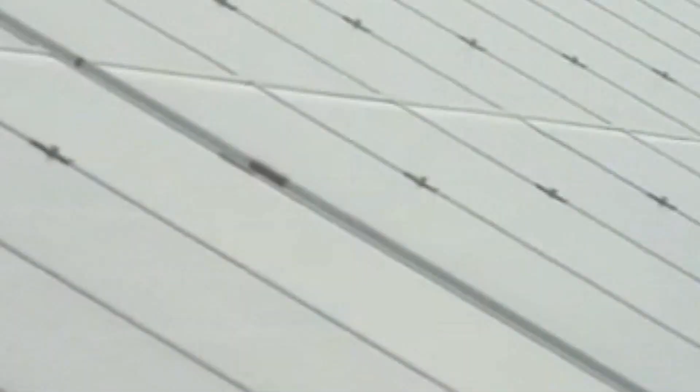Hello and welcome to the Emerald Planet as we come to you from Washington D.C. in the United States, as we look around the globe in 144 different nations, looking for those 1,000 best practices, the technology, services, and products that are making a difference as we go through the 21st century.

And one of the things we have to be most concerned about is water. As we know, around the world many countries are literally just drying out. Other places there are massive floods. It's contaminating the groundwater that people actually drink, and it's contributing to sea level rise, as some nations in the South Pacific are actually disappearing. So how do we think about water? How do we access water? And how do we make sure we have enough good water for all of us to drink?

That's the job of an organization called DC Water. Water is Life in Washington D.C. And sitting right beside me is Ryu Suzuki. He's a professional engineer, and he's the manager for process engineering, which we'll learn a whole lot about, at DC Water. Water is Life. Ryu, thank you for being here.

Yeah, it's my pleasure to be here.

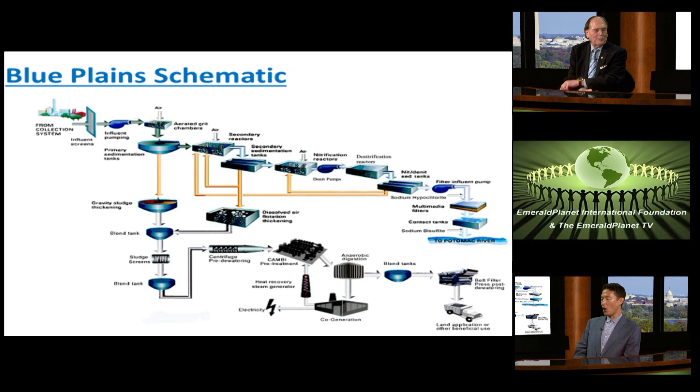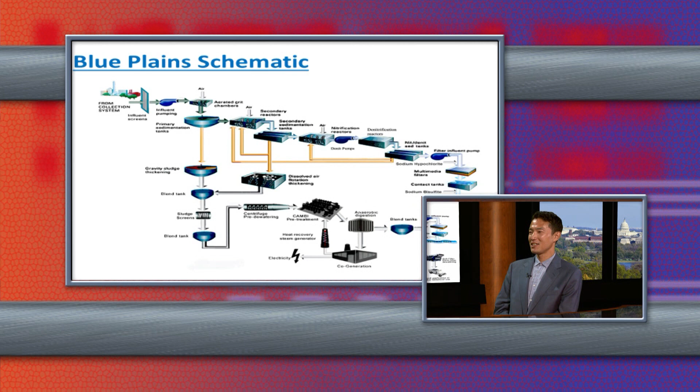The next part is called primary treatment, and all it is, is a circular tank. Imagine taking some muddy, murky water, putting it into a bowl, and letting it sit for two hours - what happens? It all settles. That's all it is, a simple physical process.

We've been doing this primary treatment since the 1930s. Whatever settles, we pump the solids out into solids processing, while the clear liquid overflows into the next process. After that is where the biological treatment starts.

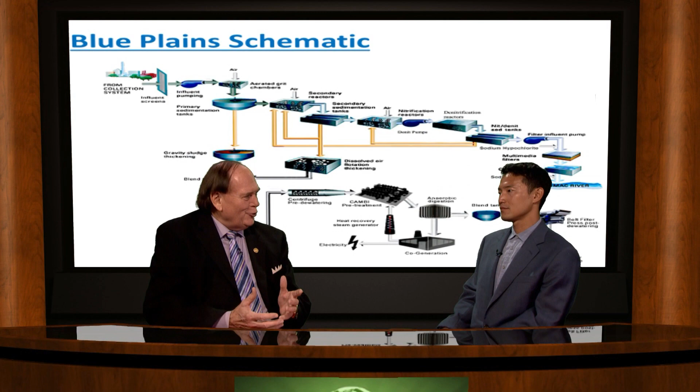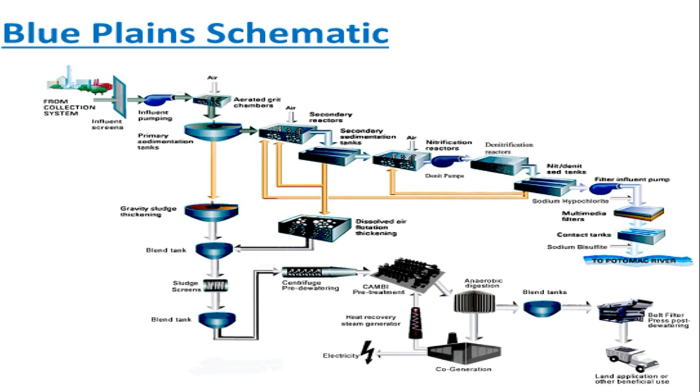This is something our viewers will find very interesting, because you've now gone from the mechanical to the biological process, where aerobic and anaerobic bacteria start to do their work. Yep, exactly - it's way more cost effective to let the microbes, these tiny microorganisms, do the work for us. There's trillions of them, which people have no idea about. It's a whole diverse ecosystem doing the work for us.

This is really a beautiful layout, and these are some of the new improvements you've made since you've been there. So what are we seeing here in these colors - the blue, the green, yellow, and pink?

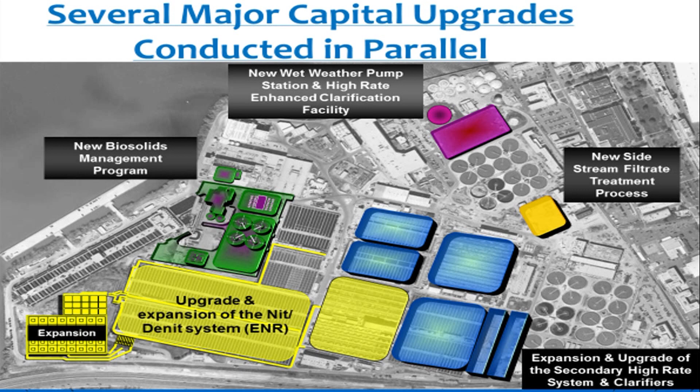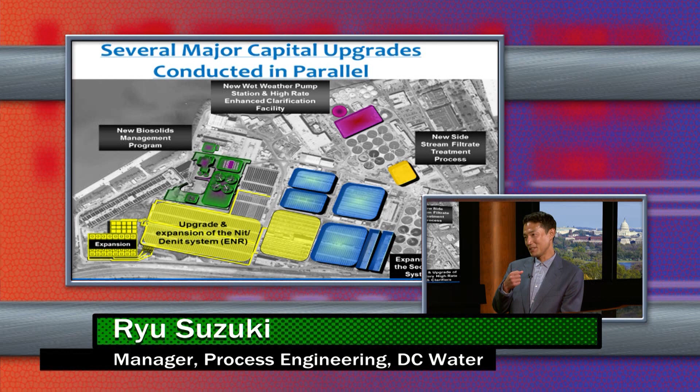The blue is the expansion of the secondary treatment, the biological system, where we add a lot of air and grow beneficial bacteria that munch away at what we flush down the toilet. In a way, these bacteria are like you and I - the three things they need are food, which is what we flush down the toilet, air, which takes a lot of energy to provide through big blowers, and plenty of water. It's about providing more space and upgraded equipment for them to do their work.

And then green and yellow? The yellow is the nutrient removal - that's also to comply with a very stringent limit, which is why we had to expand our existing facility.

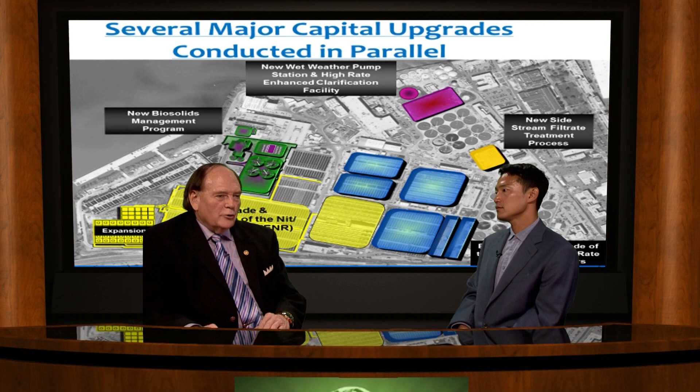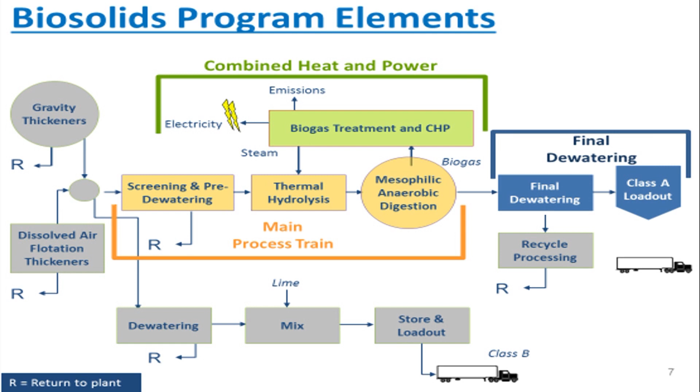We'll talk about the green, the biosolids, a bit later - I know this is really your pride and joy, taking care of all this and turning it into useful products for DC Water itself, not just sending it out to the countryside, but actually turning it into electricity, which we really want to spend time on. Yeah, absolutely, because that's very important.

We'll get to the hydrolysis later on. But looking at this, what do you see DC Water being in the next 5, 10, or 15 years as far as improving its processes and giving even better service to its ratepayers? I think the biggest thing we're pushing for relates to the Clean Rivers project with the big tunnels - we've invested a tremendous amount of resources into it. Now, because ratepayers are getting hit hard, we have to figure out how to optimize and make our entire organization more efficient.

When you look at this technology here, it's absolutely incredible, and we're going to get to that in just a little bit. This is Ryu Suzuki, professional engineer, manager of process engineering at DC Water. Water is life. Thank you for being with us as we create the Emerald Planet.

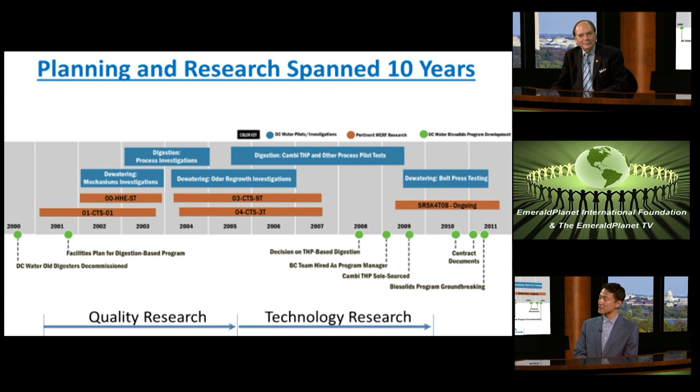And also, so you got the long-term cost as well as just to be able to create this good product. Yeah, but doesn't the regulators have something to do with this? Isn't that really one of the principal drivers behind all of this, to make sure that the water is coming out the cleanest possible? So yes, on the liquid side, we have put in enormous investment to clean the water itself, but the byproduct is the solids.

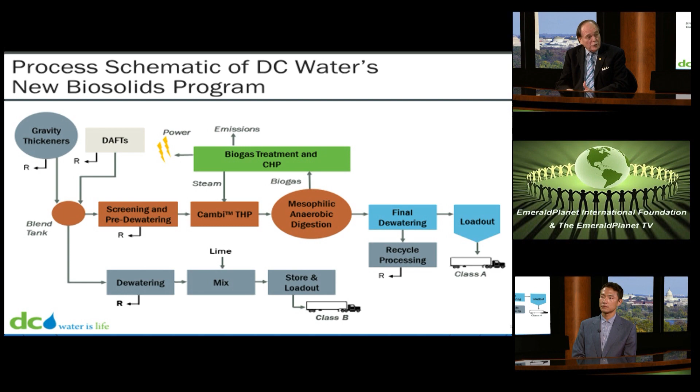And that was actually not driven by regulation. That was all more based on looking at the long-term operational sustainability of DC Water. Yeah, and that's really important. Sustainability, resiliency, and also innovation, because you really just scoured the whole world as far as finding the best technologies. So where did you actually get this particular technology that then you brought into DC Water? And now it's an incredible process.

Yeah, so actually this thermal hydrolysis, it's been going on in Europe for some time. The company is originally from Norway. This particular system that we bought, and now many other companies are getting into offering a similar product as well. So they've been doing it in Europe, and it seemed like it's the appropriate fit for DC Water as well.

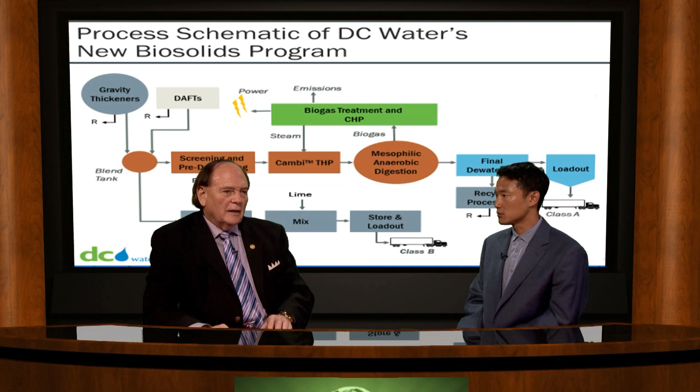Yeah, an appropriate fit we're looking at now. This is enlarged because I took over a lot of extra space out of your footprint out there. But tell us what we're looking at in this green and purple space. Yeah, so this is most of the solids treatment process that we're going to be talking about in a bit. And what we do is take this tremendous amount of organic material and convert it into clean biosolids as well as renewable energy.

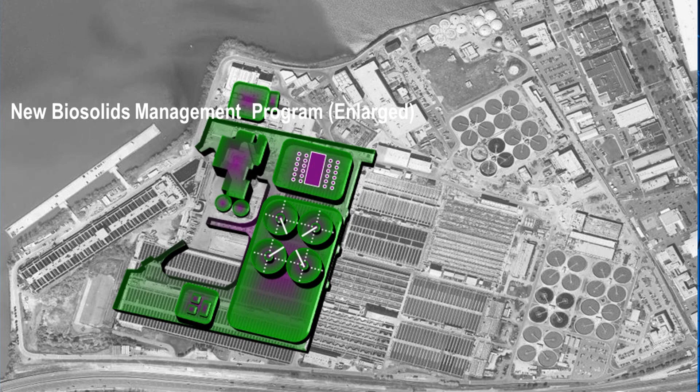Yeah, and the whole thing about this is taking that. This is a waste. You've been shipping it, it's got to go by trucks. You're trying to find land out in the countryside where it can go, but stay away from estuaries, the creeks, the ponds and the rivers and all that. It seems like you've really come up with an excellent solution because you're producing all this right there and you use it right there and turn it into a kilowatt.

Yeah, well, that too. But originally, one of the biggest advantages of having an anaerobic digestion system is before, what we did was add lime to all the solids, raising the pH up to 12 to get this Class B. And we had to truck out about 60 trucks every day. That was close to $19 million a year. And just think about the amount of greenhouse gas emissions from all those trucks running on the highways. We certainly have enough cars and traffic on the highways around Washington, D.C. We don't need more, we need less.

Yeah, absolutely. But with this new thermal hydrolysis / anaerobic digestion system, we're converting half that solids into biogas, which is a combination of methane and carbon dioxide. And it goes into another combined heat and power facility where it gets converted into electricity and heat to drive the thermal hydrolysis process, which is the steam. To pressure cook the sludge.

Yeah, and this is really very efficient that you're doing, and I find this absolutely amazing that maybe we waited so long to do this, but I guess the Europeans perfected this, particularly the Norwegians, and then we decided well, this is something we need to really try here. Was that part of that process?

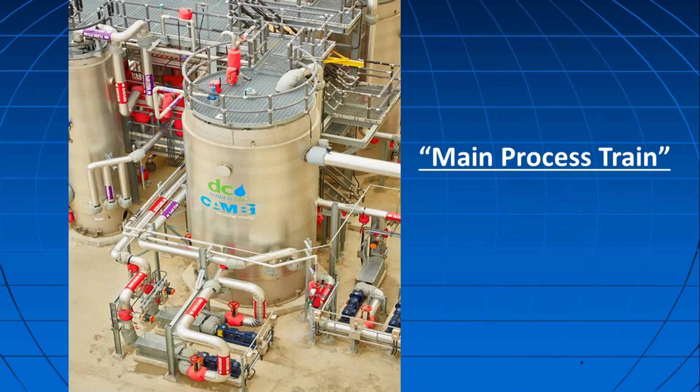So the main process train is basically the main process train of the solids processing. And what it is, not only does it include the thermal hydrolysis and anaerobic digestion, but all the other auxiliary systems that we need to be able to make this system work.

Now we have this here. This is a beautiful piece of equipment. Of course, if you like engineering and technology, this is beautiful. Other people would say something different. But the process of this, what would have been there before? Would it have been nothing, or would it have been much simpler and much less complex than what we're looking at right now?

So for the people watching, how have we morphed to the next level as far as processing? Anaerobic digestion is like a massive cow stomach that takes organic material, stabilizes the solids, and converts it into biogas. If you have raw food solids, it takes a lot of space to break it down fully and get the full reduction of solids to let the biology do the work. But if you cook the material first, like cooking beans, it takes way less stomach volume to do the same amount of treatment, making it way more biodegradable.

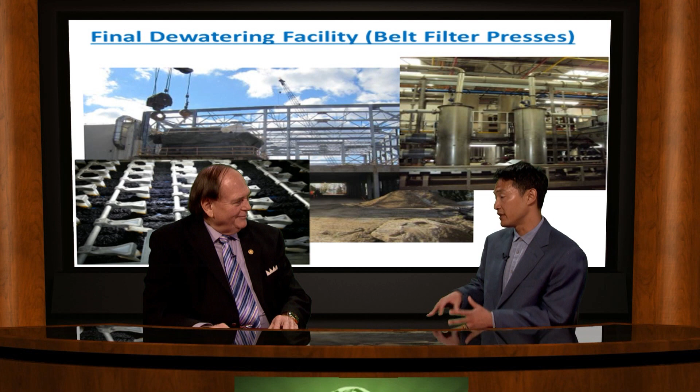Another major advantage is because we're cooking it at such high pressure and temperature, you're sterilizing the solids, since these solids have a lot of pathogens in them. At this high temperature and pressure, you're annihilating it all, sterilizing and killing all of that off.

Now, dewatering, why is that so important? We still have to haul the material from our site to different gardens and farms for land application, and you want it to be as dry as possible because water is very heavy. Also, wet solids are easier to get into streams and ponds or whatever surface water you have, versus being dry and just spread across the top of the soil.

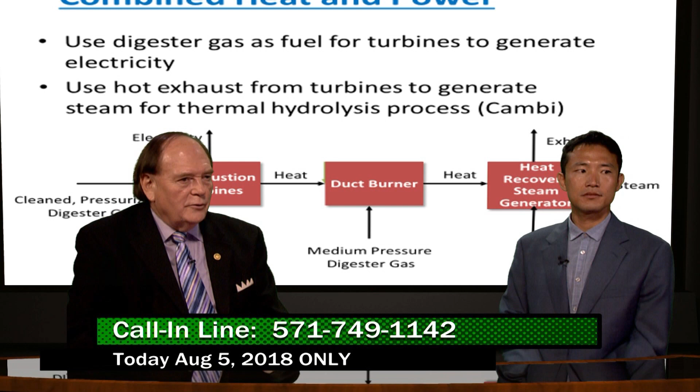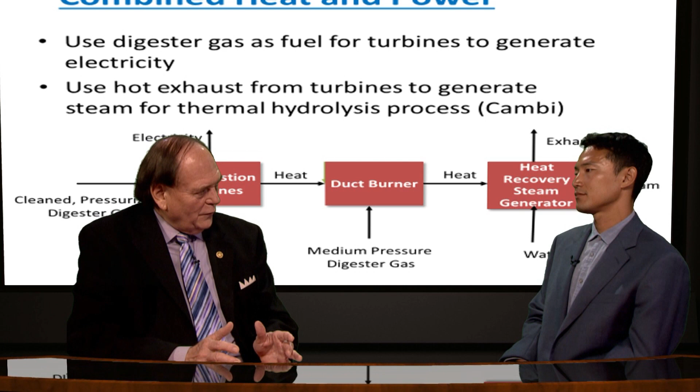Yeah, this is really a nutrient that the farmers are using. Combined heat and power is something you referred to briefly before, but it's something that's really new here. Tell us why this is so important for DC Water, but also for the ratepayers and the environment, because that's really the ultimate goal. How does this really help?

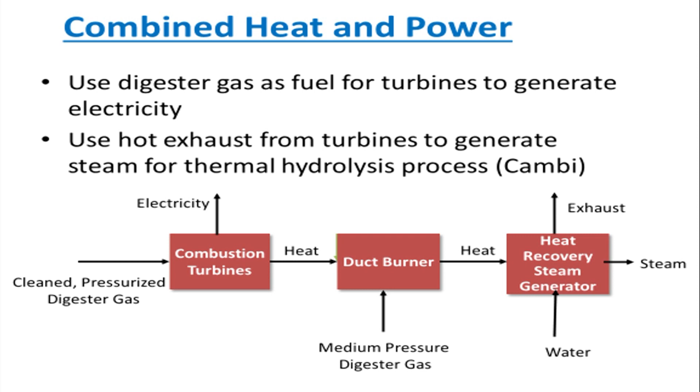In the digestion process, we generate all this biogas that has about 65% methane, or natural gas. First we clean it up, then compress it to a very high pressure, and combust it through combustion turbines to generate electricity. We're the largest energy user in the DC area, and this meets about a third of our energy needs, enough electricity to power about 8,000 homes, all from what we flush down the toilet. There's a lot of energy value in it, and that's what we're using it for.

This is really just a schematic of what we were looking at earlier, the layout of this whole facility. Looking at the future, what do you see as far as this thermal hydrolysis process over the next 5, 10, or 15 years? Do we go from a third to half, two-thirds, three-quarters? Are you going to generate your own electricity and steam, or what do you see realistically for the future?

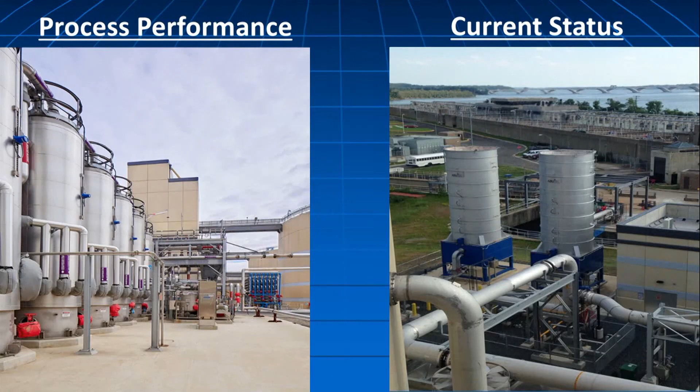For the near future, I think at least mine and our team's main goal is to really maintain and optimize the system, because there are a lot of moving parts, and our ratepayers have made a tremendous investment. So it's our duty to make sure this system is sustainable and we're able to keep running it. Process performance, current status, all of this is to make it that much better. If you can expand it gradually over time, you want to do that, but for now our main focus is to maintain what we have.

That's fantastic. Ryu Suzuki, professional engineer, manager of process engineering at DC Water, Water is Life.

This is just incredible to take this tour through your, we'll call it a campus, because it's a beautiful location, a beautiful site. Thank you, as we create the Emerald Planet.

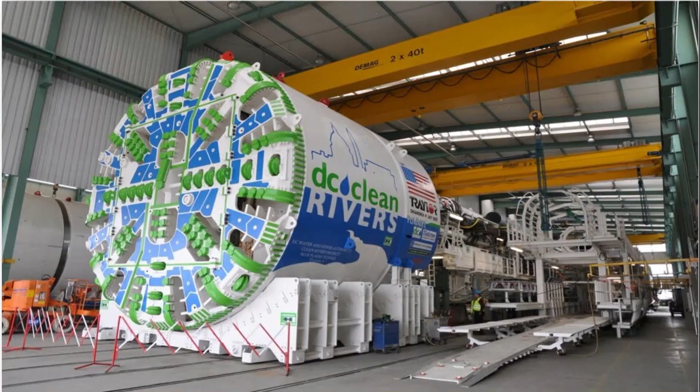Absolutely. So we're looking at one of our tunnel boring machines. This is one of the machines cutting the tunnels we're constructing underneath the district as we speak. We're building 18 miles of deep tunnels to intercept combined sewer overflow and capture that flow to keep it out of our waterways. The tunnel boring machine is typically about 450 feet long. They're assembled, or constructed, in Germany and then shipped over. At least this machine was built in Germany and shipped over in about 17 pieces. It cuts a 23-foot diameter tunnel.

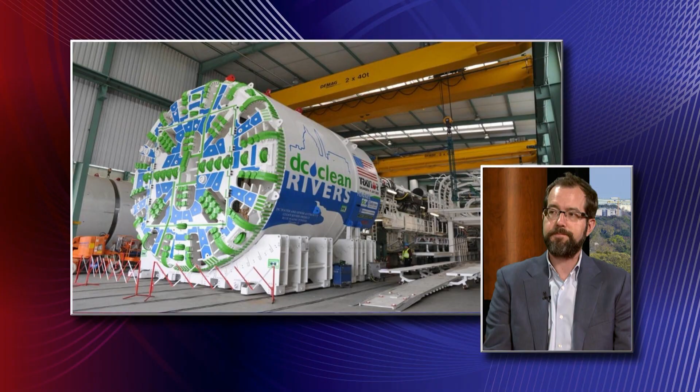That's so incredible, hard to imagine - a massive machine. Yeah, and you look at this, and it's not that overwhelming as far as looking at it, but something that can cut 23 feet - I mean, that's huge. I can tell you, as someone who's been down in the tunnel, and also stood in front of the cutter head of these machines, it is absolutely staggering, just the enormity of the machine itself. It's really just massive.

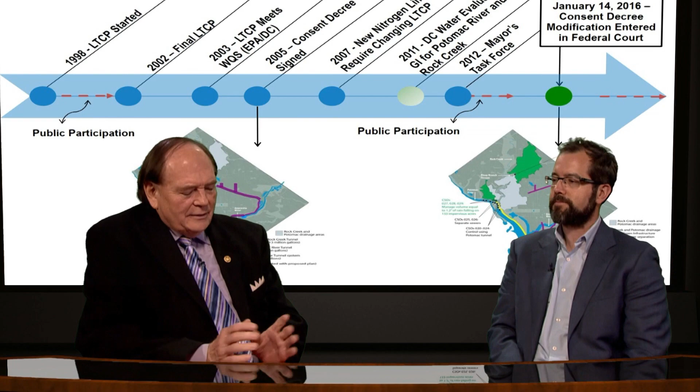Now, looking at this, there's a lot of regulations involved. We wanted to improve the rivers here, going to the Chesapeake Bay, out to the Atlantic Ocean. There's a lot of people concerned about the water coming into and going out of Washington, D.C. in this whole region. But it's a long timeline. If you look at the number of years involved, it's incredible.

That's right. We've been working on this project since the late 90s. Basically, the district and DC Water were found to be not compliant with water standards due to combined sewer overflows going into the creeks and rivers. By 2005, there was a consent decree and a long-term control plan, which is the mechanism for meeting water quality standards. We're doing that through deep tunnels as well as green infrastructure, which we'll talk about more later.

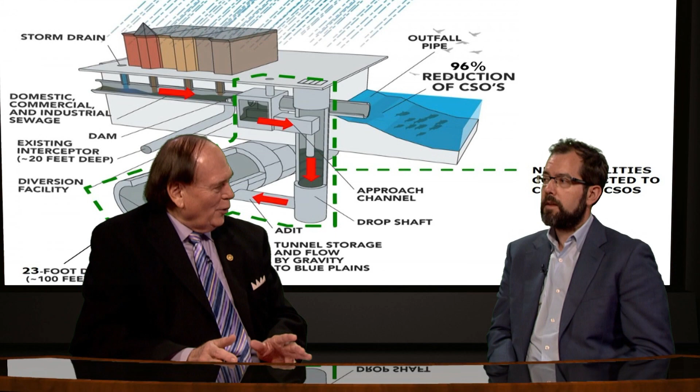Yeah, we have the schematic. Tell us what we're looking at here and why this is so different, maybe even radical from what was going on before. In the schematic, you can see the old sewer system and the old outfall that goes right into the river. It's showing a combined sewer - the middle third of the district is actually a combined sewer system, so it's one pipe for both the sanitary flow and stormwater flow coming off the streets.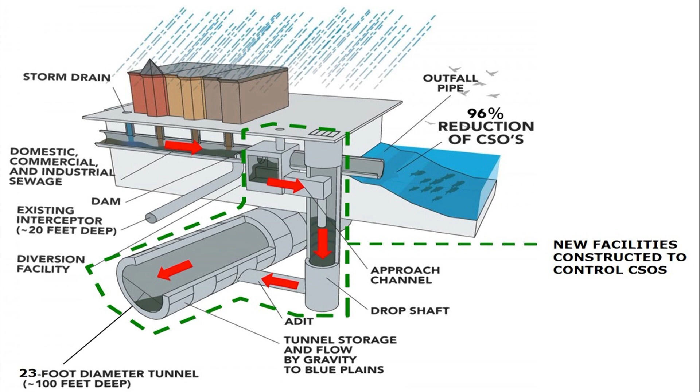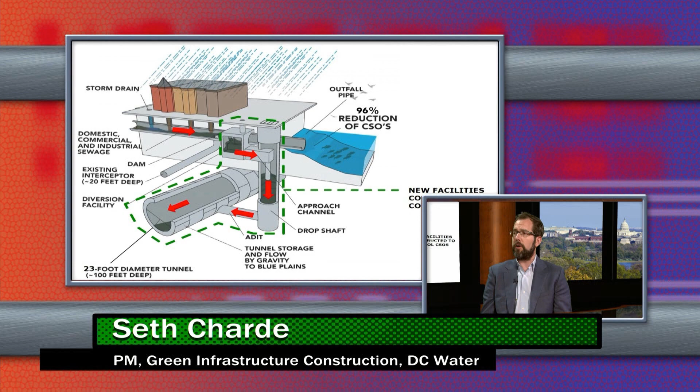Which is rooftops - very inefficient. It was actually high tech about 120, maybe 125 years ago, but now no longer. That's right, it replaced open canals and cesspools behind people's homes. But we know better now, and obviously we don't want to combine the sanitary and the stormwater. The challenge with these old systems is that when it rains too much, there's not enough volume inside the pipe, and they overflow by design into our creeks and rivers.

So looking at this schematic, it's showing essentially a diversion structure and a new tunnel we're constructing. That diversion structure pulls the water that would have otherwise gone into our river and directs it down into the tunnel, where we can convey it down to Blue Plains to clean it up. Yeah, and that's the main facility - this is a bird's eye view of all this.

Now we're looking at this massive hole that's been opened up in the ground. You're going through neighborhoods, and of course this is very disruptive, not only to this neighborhood, but the traffic and the whole city. So how do you lessen some of this, but yet have people understand this is critically important for everyone's future?

Right, right. So this particular project is the First Street project, and we actually advanced this construction - it was originally supposed to take place a few years later. The neighborhood has historically received flooding during high rainfall as a result of undersized pipes that are also part of the combined sewer system. So we advanced this part of the project, and the First Street project was a little tighter than some of the other tunnel aspects we've been constructing.

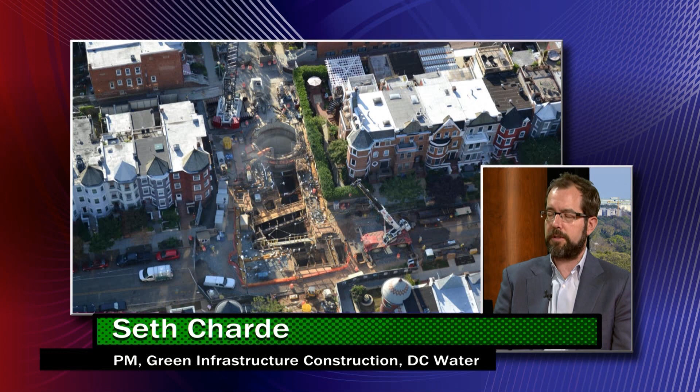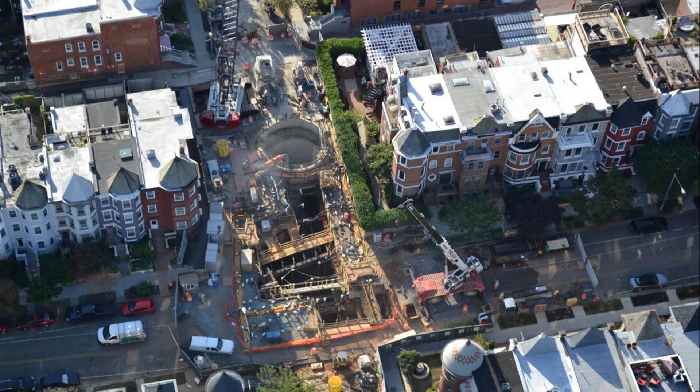Yeah, we're going back to this massive unit - let's see if we can get back to this. This thing has got to go down through here, is that what I understand, or how does this monster get into this? Okay, so what we're looking at at First Street is actually a drop shaft, and some of the work to build the diversion structure. The tunnel itself and the tunnel boring machine was dropped north of this point in another drop shaft where we had a little more room to work. The staging areas for dropping the tunnel boring machine are a little bigger than what you see on the First Street site.

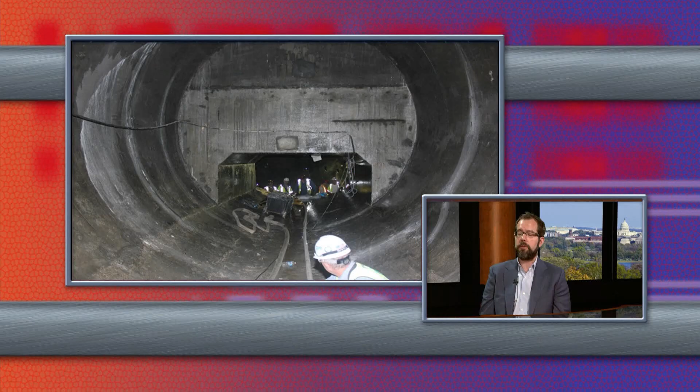Well, looking at this gives you an idea of just how huge this is - we have a human in front of it, and we see others in the back. This is massive, absolutely massive. And all this is going on under the city, and there's going to be multiples of these, correct? That's right. These tunnels are being dug anywhere from 100 to 150 feet below ground. It cuts a 23-foot wide interior diameter tunnel, which is bigger than the metro tunnels, and we're building 18 miles of tunnel.

So 13 on the Anacostia Blue Plains side, and then another 5 on the Potomac side.

Yeah, this is just amazing. Tell us a little bit about what we're seeing here, not to be too technical, but just how all this works together. And you're doing, would you say 100, 150 feet below the surface? Below grade, that's right. That's incredible.

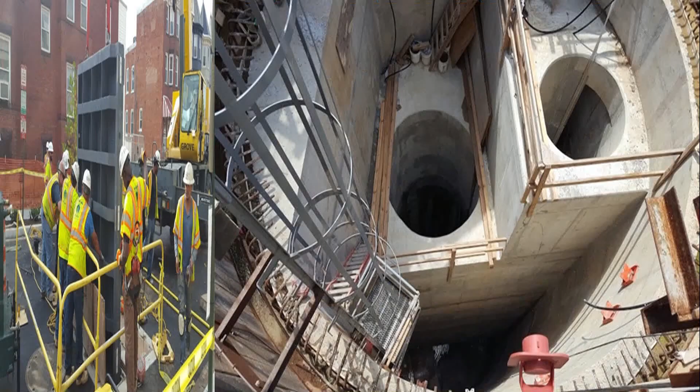So part of the challenge is, the sewer system is not 150 feet below grade, and so we have to convey that flow down to the tunnel. We need to do it in a way that reduces the amount of air that's in the water, because air takes up space. So what we're seeing is part of the diversion chamber or diversion structure, which directs the water from the existing sewer and brings it down to the bottom of the shaft and into the tunnel, while reducing the amount of air in that flow.

And this is all part of that process we're looking at here. That's right, a similar aspect.

Now looking at this, is this precast concrete? Is it poured on site? How does all this work? Because we get a lot of questions. That's why we've been trying to get you on the program for so long about how this thing really works. People see it, but they don't know exactly what it is.

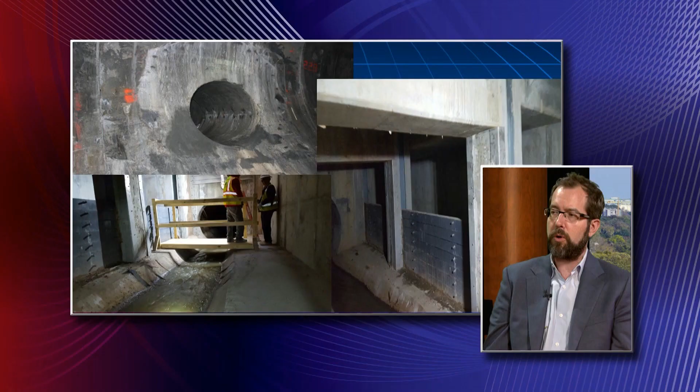Right, so the drop shafts and diversion structures, most of those are cast in place, cast on site. The tunnel segments are all precast, 7 segments for each ring, and those are precast off-site, not too far from here, but they're trucked in, and then we bring those out to the face of the tunnel boring machine on a little train. There's an arm at the end, a robotic arm, that picks up those segments, puts them in place, and then the sandhogs, the crews that operate the machine, get up and bolt those segments into place to finish one ring.

This is incredible. Now this is a composite of 3 different photographs, so we're looking at multiple parts here, and as we say, this really is moving parts. So tell us a little bit about this.

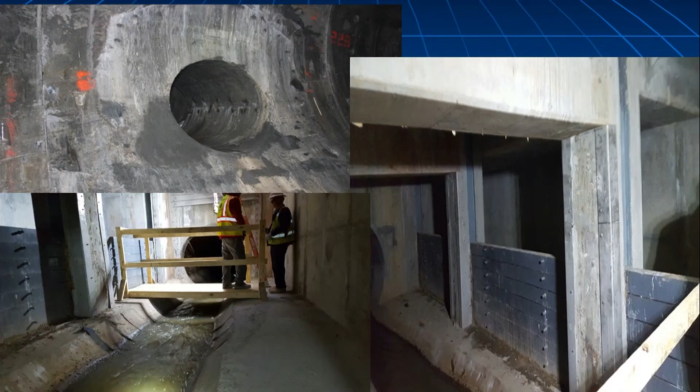Sure, so the smaller circular hole you see there, that's an adit, and it's basically a connection between one of the existing sewers and the tunnel. The other component is an existing sewer with a weir, as we're seeing the inside of the diversion structure. So again, when we have high flow conditions, the weir allows that flow to pass over, get into the diversion structure, and make its way down into the tunnel. Otherwise, the flow would stay within the channel of the existing sewer system and go down to Blue Plains as it would in dry flow.

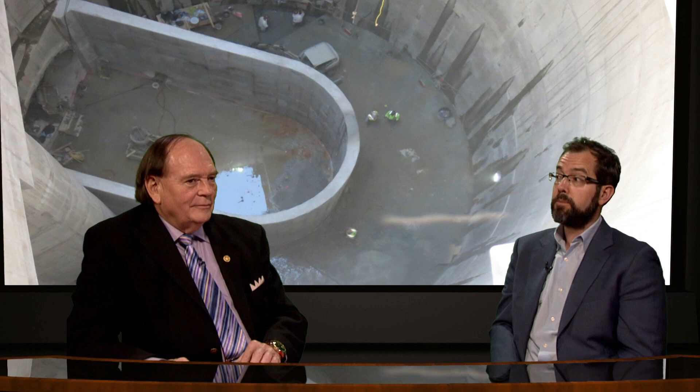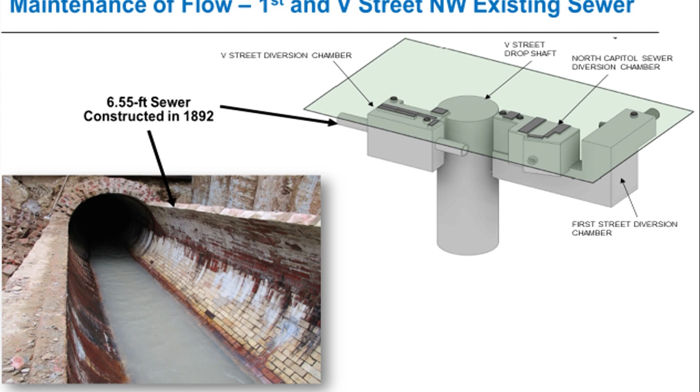So all this money the ratepayers are putting into this, and the bondholders and all that, they're already seeing benefit from this, correct? Absolutely. So the first segment of the tunnel has been constructed, that's the Blue Plains segment, and that was put into operation in March of this year, March 20th. Since March, within 4 months, we've kept over 2 billion gallons of combined sewer. 2 billion gallons with a B. That's right, that is absolutely incredible.

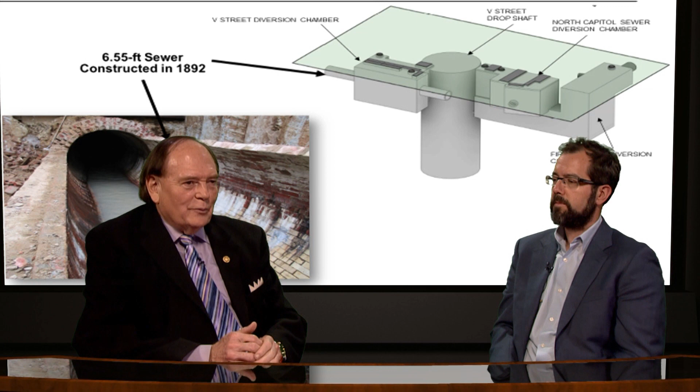And I understand there's just thousands of tons of trash that's been siphoned off as well. About 130 tons of trash. That's just incredible. And what we're looking at here, this is something from 1892, one of these old chambers, and we're doing all this new work around it.

And we're just going to put some of this in here. But the last question really is the big dig. What do you see as the advantages of that expanding and really helping the city, the environment, Chesapeake Bay, the Atlantic Ocean, and the ratepayers over the next 5, 10, 15 years?

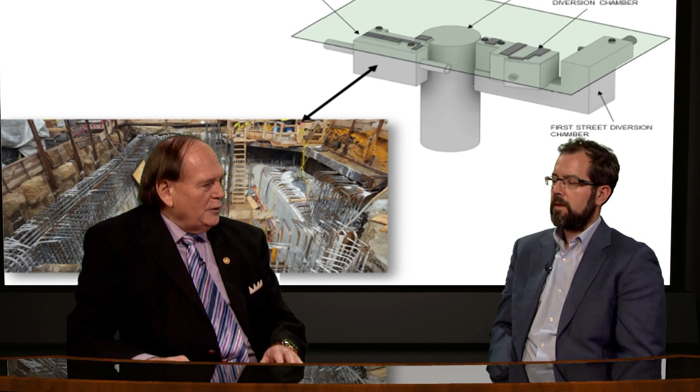Well, it really comes back to fishable, swimmable rivers, and that's really the key. Absolutely. So meeting water quality standards, having safe, fishable, swimmable rivers, and obviously bay restoration and the economic engine that the bay is for the region.

Yeah, so what is your hope as a professional doing all of this? We're going to talk about green infrastructure and all that, but as far as the big dig, what is your hope for this, and what are you actually seeing? And then we have to get off.

Well, so the tunnel is engineered to have a 100-year design life, but given the quality of the construction, the quality of the tunnel, I think we're going to see more of a 200 or 300-year design life. That's absolutely incredible. And we go back to, we saw those tunnels going back to the 1800s. I mean, they've lasted. It's new technology, and it's a new life as far as the environment.

Seth Charde, Program Manager, Green Infrastructure Construction, as we create the Emerald Planet.

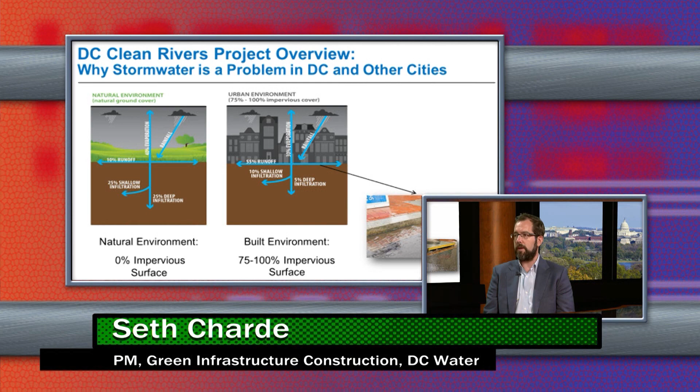And so we can really see that with green infrastructure. Yeah, and the whole thing about this green infrastructure, my understanding is we're already above 35, maybe 37% canopy, meaning trees all over the city. And of course, we have a lot of grass. Rock Creek Park is a giant carbon sink, as we know. So it's very important that we have this to complement all this high technology you have.

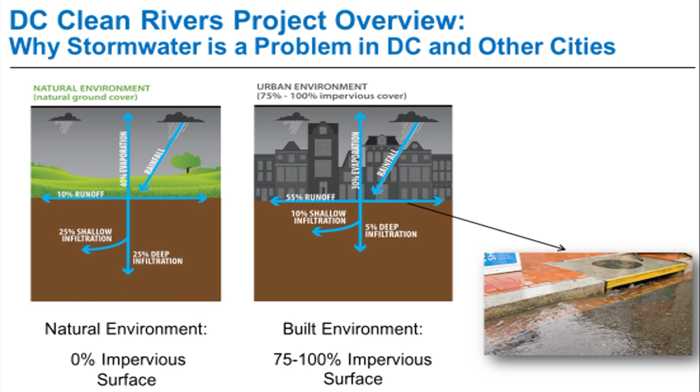But let's go through the pervious, impervious, and then we'll lead right into what you're actually doing as far as this green infrastructure, and we'll see some of that. Sure. So despite having all these trees and despite having Rock Creek Park, much of the district is impervious surface—that's roadways, rooftops, sidewalks, parking lots.

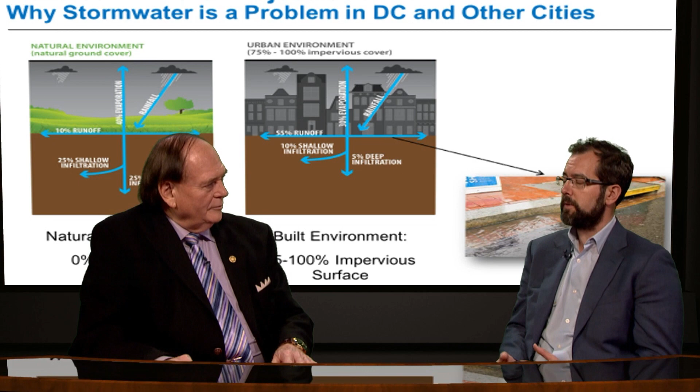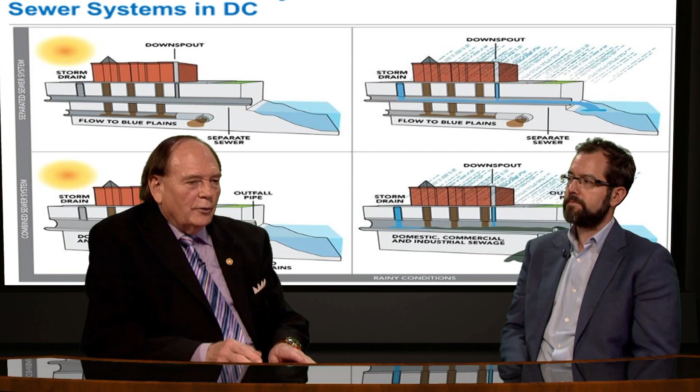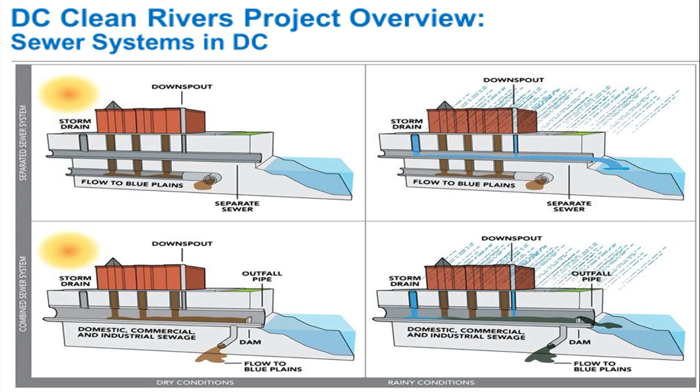Yeah, and looking at this as far as the sewer systems, we got this overview and these 4 different drawings here. How does this really relate to Washington, D.C., the ratepayers, but also downstream, no pun intended, as far as the quality of water and what's ending up in the Chesapeake Bay and then, of course, into the Atlantic Ocean?

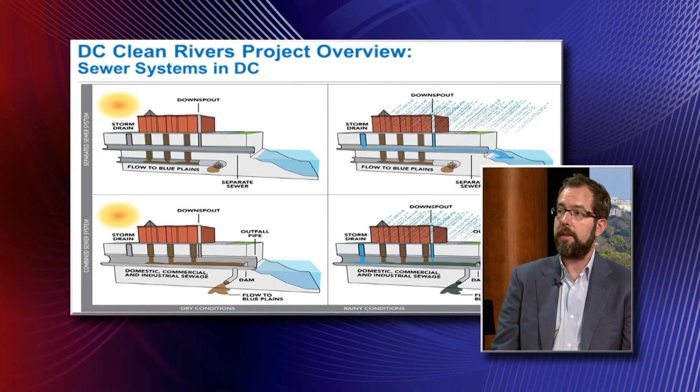So the district, like many older municipalities in the United States, has this combined sewer system, and this is a legacy system. In dry conditions, flow stays in the pipe and goes down to Blue Plains where it's treated and cleaned up. When we have too much rain, there isn't enough volume in that single pipe because it's a mix of sanitary and storm flow, and it overflows by design into the creeks and rivers. Introducing raw sewage into our creeks and rivers is not healthy for our immediate community or any of the downstream communities.

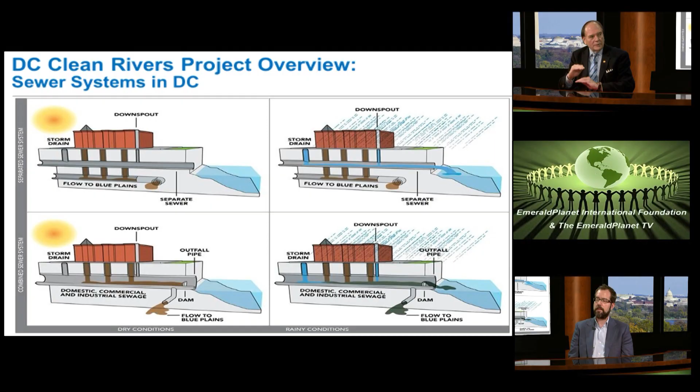People don't realize the damage from the increase in rainfall. Now they're saying we have a margin of maybe a third more volume, and scientists are actually using this term because of these cloud bombs and all this change happening because of climate change. It's destroying the riverbanks and doing real damage to the environment.

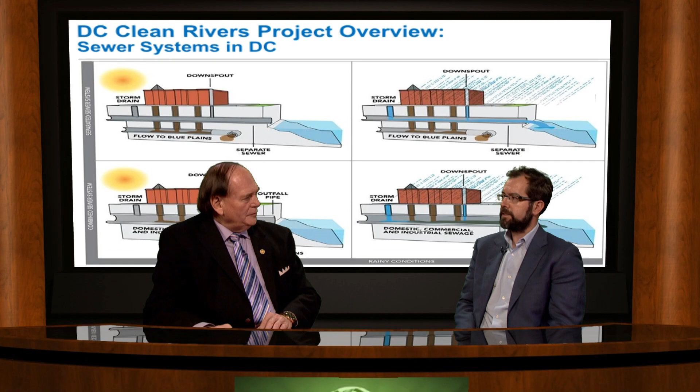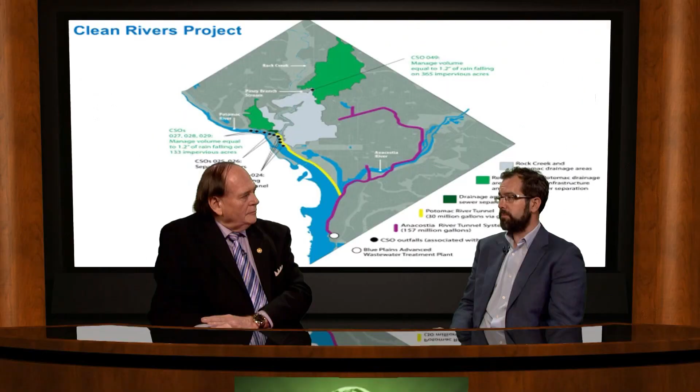These huge spikes in flow are really unprecedented. You're seeing scouring of the stream banks that's picking up a lot of sediment, transporting that sediment through the aquatic systems, destroying aquatic habitats, polluting the rivers, polluting the bays. So by holding that flow back, keeping it out of the creeks and rivers using green infrastructure, we can really try to reduce some of that sediment and pollution.

Now going to this Clean Rivers project, we talk about the big dig, and I put this up — I didn't use it in the last segment, but I wanted to put it here. This shows there's a tremendous investment, and then we're going to go into your green infrastructure. But how does that then, no pun intended, flow right into what you're doing as far as your green infrastructure? How do these two fit together? Because you've got the huge technology, and then you've got just beautiful streets.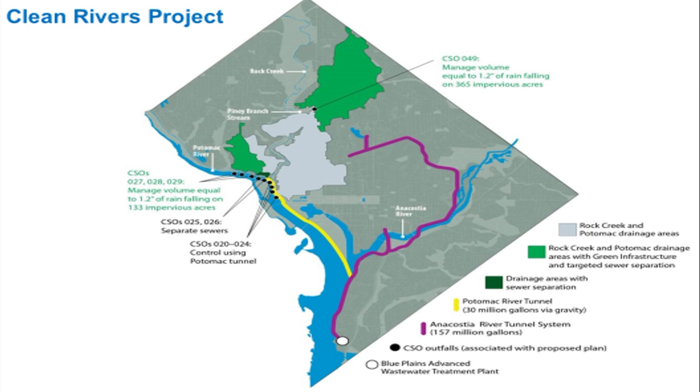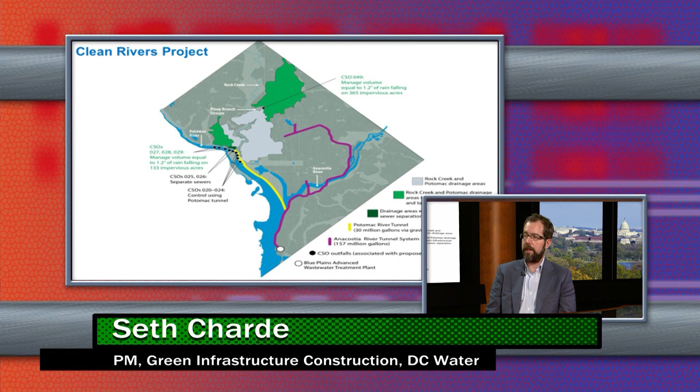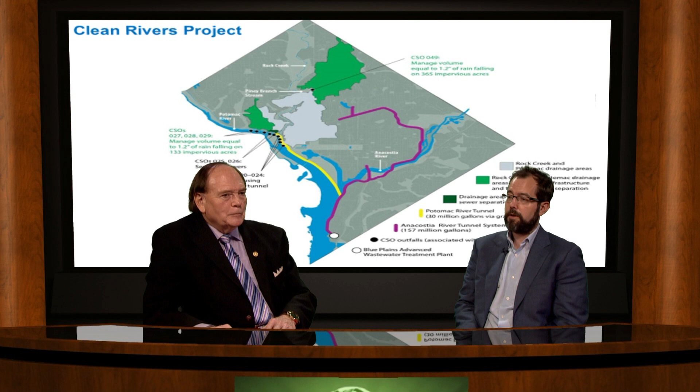So the map we're looking at shows the tunnel system as well as the target areas for green infrastructure. On the right side of the map, that's the Anacostia tunnel system, and on the left side, that's the Potomac tunnel system. We were looking at the volume of flow and also the timing of implementation, and made a decision about pursuing the tunnel-only option on the Anacostia side. Looking at the flows and existing conditions, green infrastructure made a lot of sense for the Rock Creek portion, and also the northern Potomac portion of the watershed.

Yeah, this is called bioretention. What is bioretention? We have probably four or five slides, so let's step through these and see how they're different, but also how they really go to the same benefit and the same purpose. Bioretention is one of the suite of green infrastructure practices that we're using. Essentially, we are mimicking natural processes.

It's constructed by excavating out about four or five feet. You backfill with gravel, which creates a storage area for holding water, and then on top of that you put a very sandy planting soil and plant out the top. So from the surface, it looks like a garden — sometimes these are called rain gardens. But from a functionality perspective, it can bring in and store a lot of water coming off of our streets and rooftops, and it infiltrates that water down into the ground or slowly releases it back into the sewer system after the storm has passed.

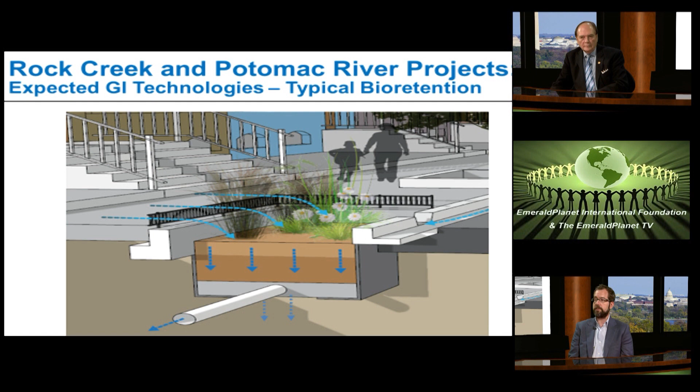Now, I've heard over the last couple of decades that the amount of inflow coming into the Potomac River has been about 4% less per year — I haven't verified that. But having this, now we're actually capturing that, and we're increasing the water table throughout the district. Is that going to help as far as the flow, both for the Potomac and also for the Anacostia?

So we're not anticipating any increase in ground flow. In fact, we are constructing all of our facilities connected to the combined sewer system, using a flow restriction device to slowly release that water off. Where we can infiltrate, we will, but that's not necessary to the functionality of the system.

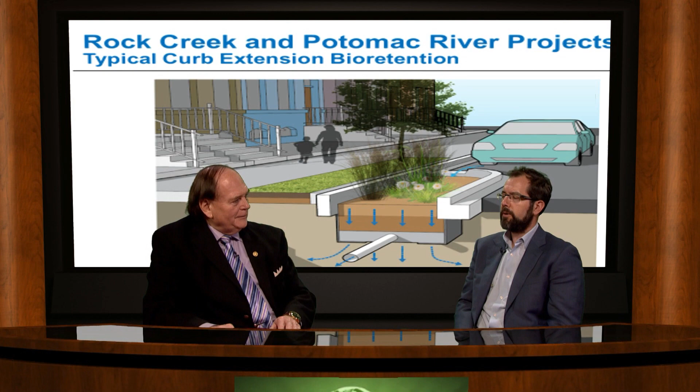John from Fairfax is calling in about bioretention, asking why you're using plants and then the gravel and sand. But it looks like there's pipe in here. What is this pipe doing, and does that go to the point of actually putting this into this new system? In the facilities we're constructing, we always have an underdrain, and we use a flow restriction device, connecting that back into the combined sewer system.

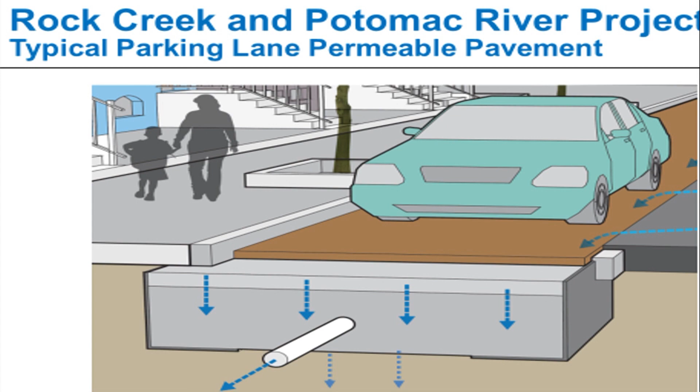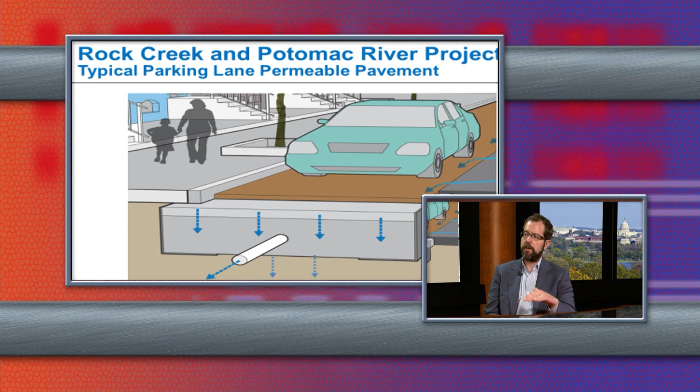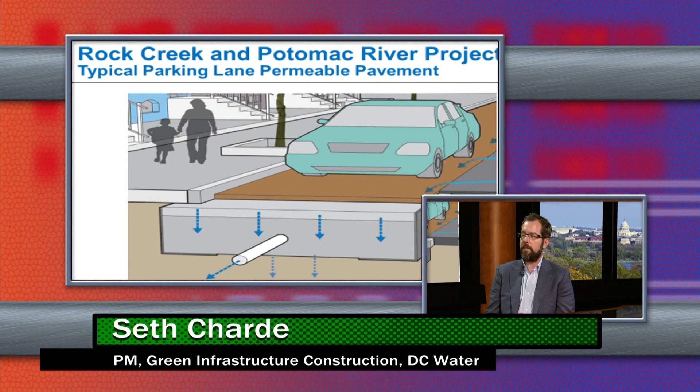So imagine a storage tank with a very small hole. It lets out a very small amount of water at a single point in time, so we can fill up the bioretention. The storm passes, the capacity in the pipe in the street empties out, and then we can slowly release back in after that storm has passed. The plants also help to filter and clean the water, so it gets cleaned up within the bioretention before it goes down into that aggregate storage bed.

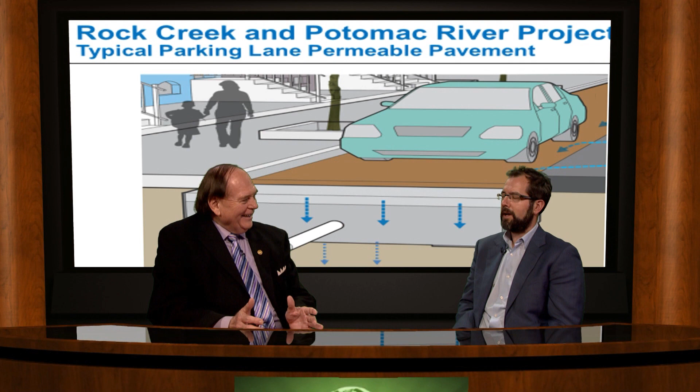I think if John looks at this, you can see exactly what you're talking about, the little tiny hole coming out through this pipe, slowly releasing this water. But going to this permeable pavement, what is permeable pavement? Now we're starting to see this all over Washington, D.C. I do a lot of walking, and as I walk around the city, I'm seeing more and more of this.

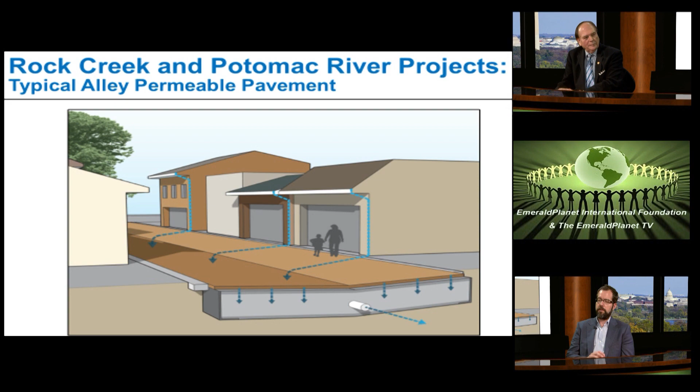Permeable pavement functions very similarly to bioretention. The main difference is there are no plants. From the surface, it looks like any pavement, like a cobble, concrete, or asphalt. But we excavate out, put down a gravel storage base, and a smaller gravel on top of that as a setting bed. Then we either place precast pavers or bricks, or do a porous concrete or pervious asphalt on top. The porous surface allows rainwater to go through down into the storage base, where it's held for a period of time and either infiltrated into the ground or released back into the sewer system.

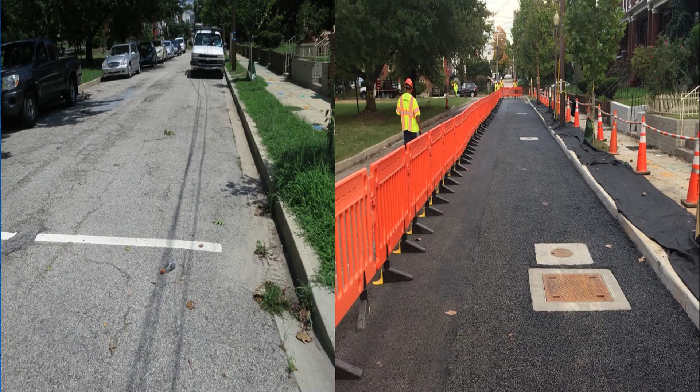John, our viewers can see this. You have one that's impermeable asphalt, and then you look at the pavers here. When you're walking down the streets — I have to walk the dogs, so I'm out there when it's really downpouring — you can tell the difference going alleyway to alleyway or street to street. In a rainstorm, you might walk down one of these alleys, and the noticeable difference is that you don't see water flowing through them. It goes immediately down into the pavement surface.

These pavement surfaces typically have an infiltration rate of around 60 inches per hour. How much? 60 inches per hour. Oh my goodness, that's absolutely incredible.

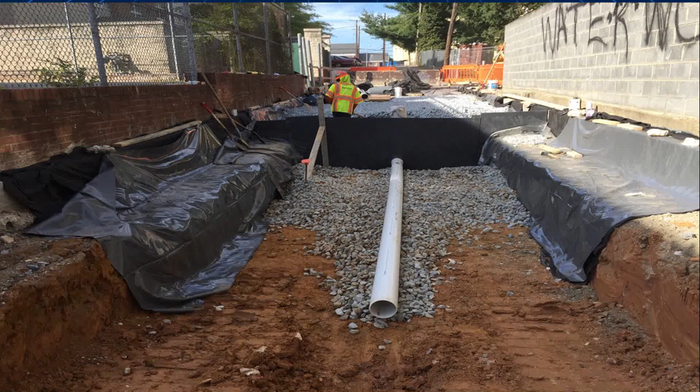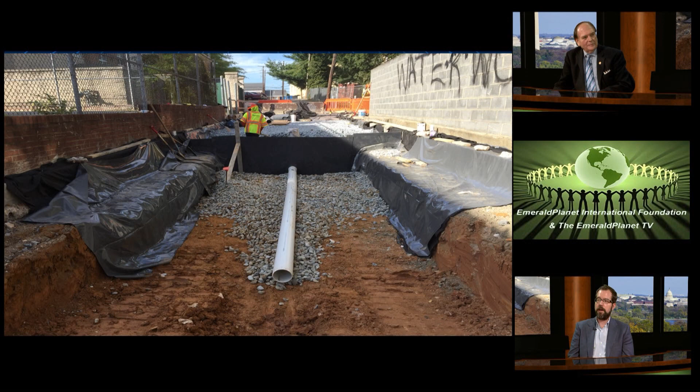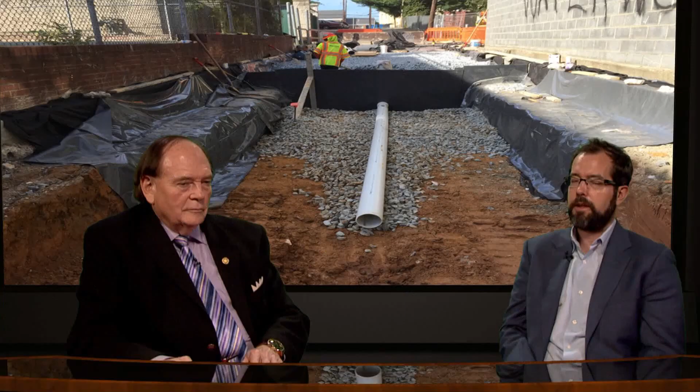Now we're looking at what this really looks like. You've been describing this for us, so let's go over this — we're about running out of time, but John and many others will know exactly what we're talking about. This picture is showing one of our permeable pavement facilities being constructed in the alleyway. What's nice about this picture is you see a lot of the elements: the excavation, the underdrain, a check dam which helps us manage the slope and the water within the facility, and the various layers of aggregate behind it, and some of the clean-out structures. Of course, when this was ready to be paved, we just put a pavement surface across the top.

We've got to be quick. You'll see more of it in all of the neighborhoods, but those are under other regulations being applied district-wide. You will definitely see more of it within our green infrastructure areas, as we're still constructing our first projects, and we have about 12 more years to finish out the overall program.

That's incredible. This is Seth Charde, the program manager of infrastructure construction, as we create the Emerald Planet.